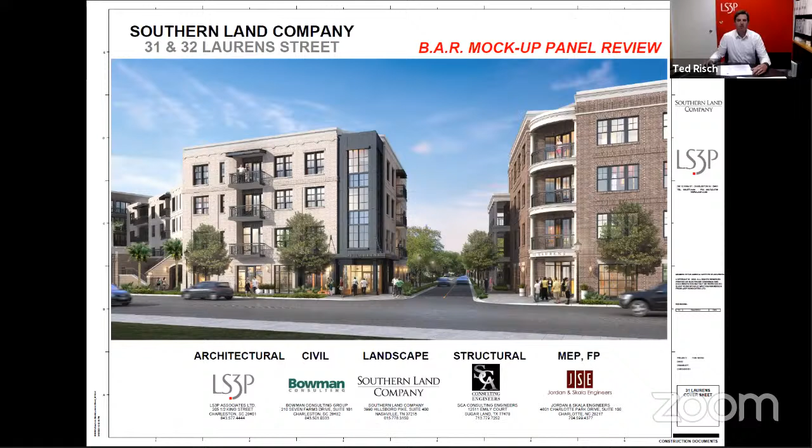I'll move right into the building A panel. Starting on the left is building A. We have our stucco wall panel on the far left of your screen, FRP cornice at the top, and carriage door with a projected box bay.

One note in the application was we deviated from the approved design of the concrete slab edge. Our original concept was to form that into the concrete using an edge form, and we weren't satisfied with how that turned out. So we're proposing this alternative design, which we had previously in an earlier iteration of the project, in a pre-finished aluminum channel. We feel it's more successful and gives us that consistent look we're going for.

Moving toward the center, we have the cast stone surround that appears on building A around this window. We abbreviated that from the original approved design as it felt a little chunky when we looked at it on the mock-up, so we brought that profile in. One item we noted yesterday on site was the vertical portion of this surround is going to have a window shoulder to sit on to resolve a sloped mortar condition on the corner there.

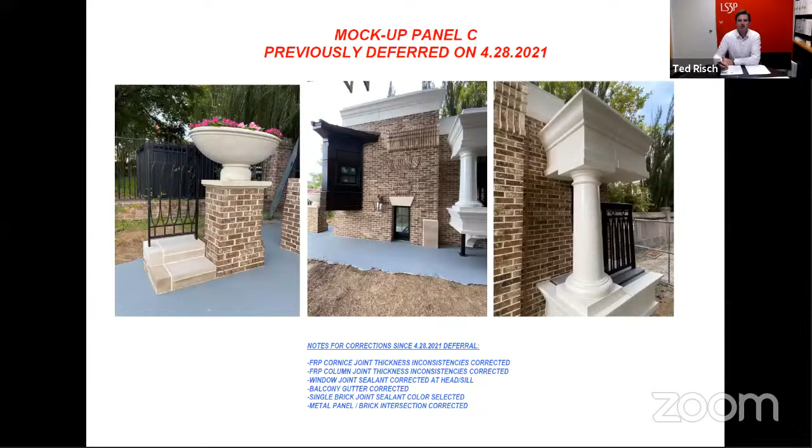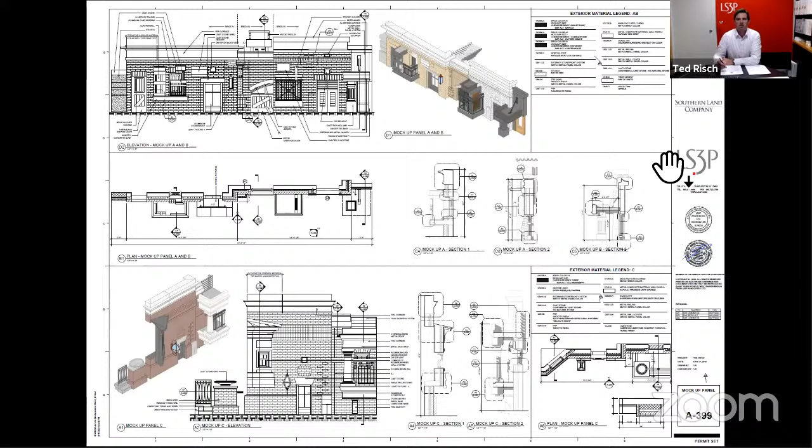The one item I was hoping to get some resolution on was the window sill nosing. When we met on site yesterday and reviewed that, I thought everybody was on board with the design direction there. That piece is a factory-installed piece of the window that goes into the accessory groove, similar to the brick mold around the window. I just wanted to make clear it's a pretty traditional design as part of the window assembly, not a separate piece, so it's actually not on the storefront—it's on the window.

All those windows start at level 2. There might be 1 or 2 on the ground floor of building C, but you won't actually be able to see that from the street or from the right of way. It is in fact part of the pre-finished aluminum window assembly.

It's due to the fact that our windows are recessed so far into the wall that we needed that projected sill nose to span the gap between the window assembly and the brick sill. If we don't have that, we'll have to introduce a new material to span that gap, which will cause a little bit of discontinuity in the waterproofing, and just another element in the window assembly we don't really feel is necessary. So I just wanted to clarify that.

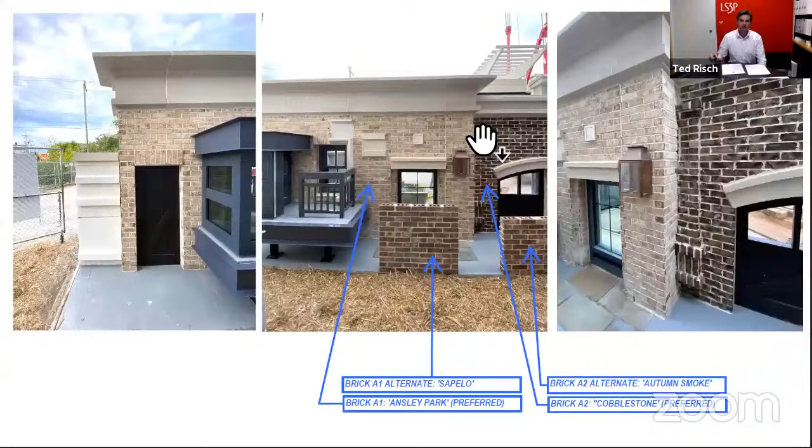And then obviously the long lead time items we are focused on at this point for the project are brick and windows. So, thank you.

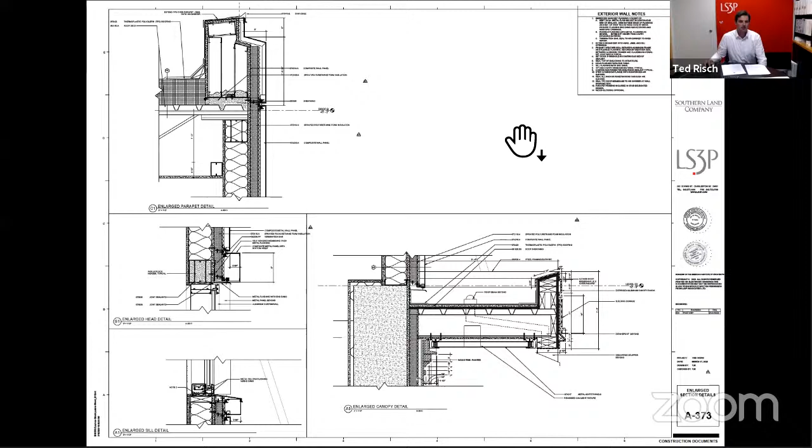Okay, we will now move to board discussion and a vote, potentially a vote. What do my fellow board members have to say about this project?

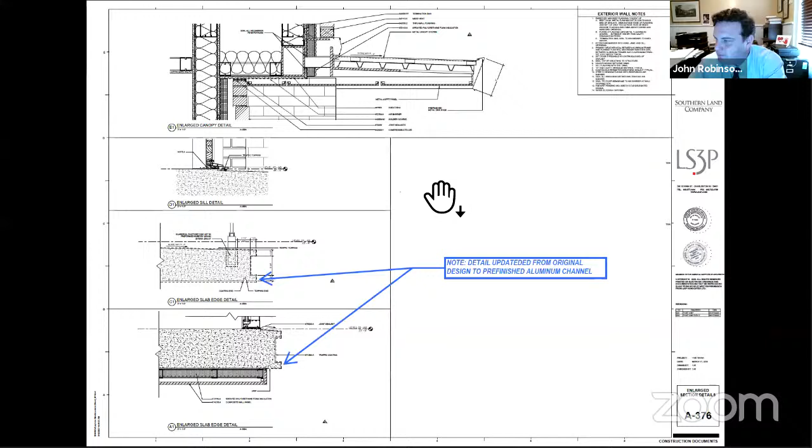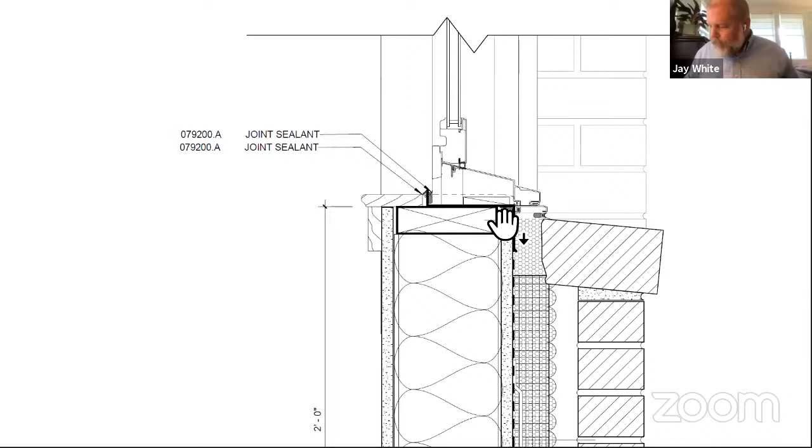I'll jump in very quickly on this. I don't really have a lot of comments. I know staff has spent a lot of time and produced an exhaustive list. I'll go by method of exclusion, the ones I have concerns about. I actually think those sill extensions on the windows are fine—that's a very typical thing. I understand they're using tabbed windows here, so they're trying to close a gap, and I saw no fault with that.

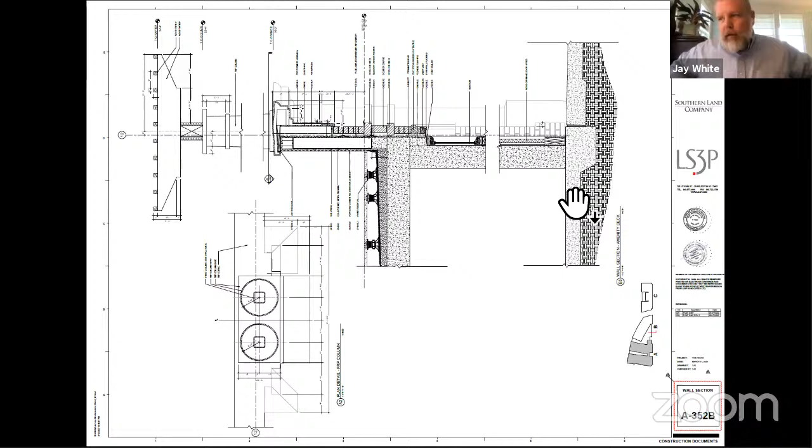Let's see what else. There was a discussion about the FRP column—I'm going to jump between buildings here, so I'm just going to be frenetic. There was some discussion about making sure the ceiling of the canopy or deck above was designed such that it reflects a beam or joist that bears upon that column. I think we all had a sense of what that meant, and it's just a revision to the ceiling design that would achieve that. It would be much improved, rather than just having that column sitting right above some bent, field-formed metal on the ceiling plane.

I would really caution the team to guard that precast or cast stone, because there were some dings that were repaired, and it was very obvious where that happened. Similarly, make sure the mortar joints between those units are really well tooled, because that was a little bit of a rough spot we noticed in the field.

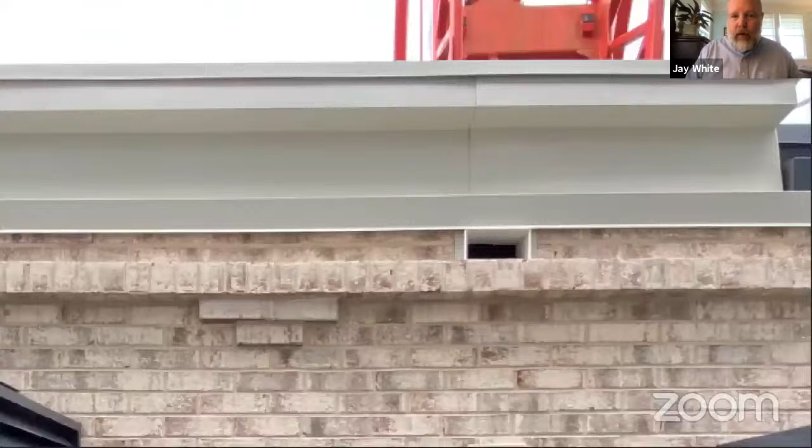A couple things I'm a little concerned about: it seems staff is recommending we abandon the kick at the base of copings and other flashings. That's now what I'd consider a traditional detail, to make sure you have a drip condition where you transfer from the metal to the facade material. That even shows up in 18th or 19th century architecture, and I'm not opposed to it so long as it's clean and crisp. I don't want to dissuade applicants from doing what is almost universally typical in architectural practice these days.

Similarly—and I lose my train of thought—with through-wall flashings, my studio's practice is to stop through-wall flashings on brick masonry at the face of the joint. That's debatable now, but if we're going to accommodate professional discretion and let people extend through-wall flashings beyond the face of masonry, we really ought not ask them to paint it, because that's a little tiny 3/8 inch strip of metal that occurs repeatedly throughout the facade.

We're asking them to paint that and keep and maintain that paint coating. I think it would be better if an architect, developer, or applicant wants to project their through-wall flashings beyond the face of masonry, just ask them to use copper or stainless or something that will weather appropriately. Lord knows we don't want aluminum or galvanized, but asking them to paint that is not really going to work in the long term. That's the sum of my comments.

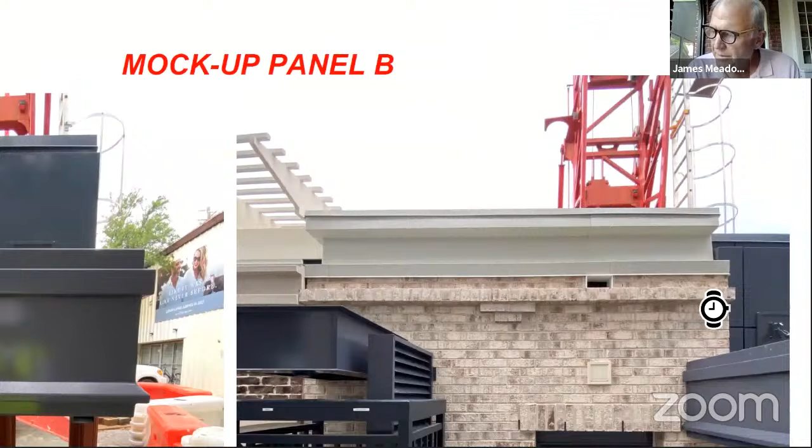As we discussed yesterday on site, the pop rivets should not be visible or exposed, even at an elevation where it's not visible from the street. They should not be exposed. Cut edges of roofing and flashing materials should not be exposed. Fasteners used for anchoring should be non-ferrous materials.

The sill on the mahogany window, I agree. I felt that it just did extend a little too far. Thanks for cutting that back.

It was unclear to me, even though I got down underneath and looked at it, how the bottom of some of the balconies were going to come together, and the small outlet that water would be draining the built-in gutters and the porches. I was unsure of where that water was going when it came out of that scupper.

I agree with Jay. The sill extensions on those windows actually come with a groove for that sill extension to be applied. And the way this wall is put together, I think that is better than adding an additional material to waterproof the window.

Also, on the strip of through wall flashing, if it is extended through the joint and then turned down, it must be a non-ferrous material. I agree that painting that probably would not be successful a long time because the edge may be cut unless it's coated after it's been bent. So some type of non-ferrous material.

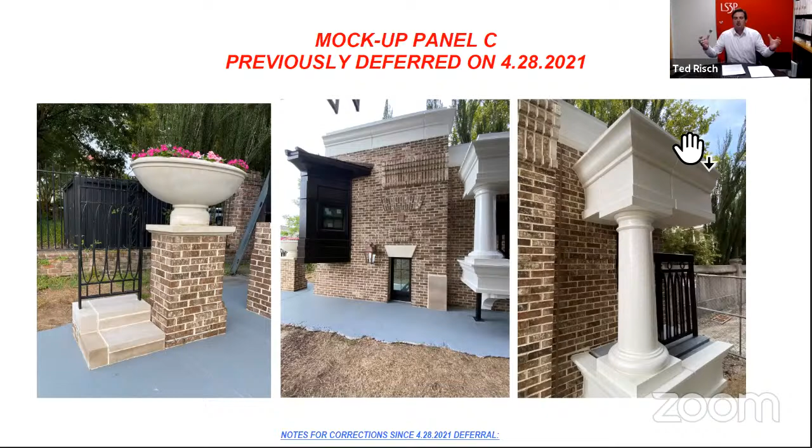Building B. Okay, so buildings A and B have a textured acrylic coating for the underside of the balcony that goes all the way to basically the drip line that returns on all three sides of the balcony. Okay.

So it's not going to be exposed concrete. It's like a direct applied finishing system. So there's no visible concrete. You won't see it. No, you won't be able to look up and see concrete. Okay, that's it. Thank you.

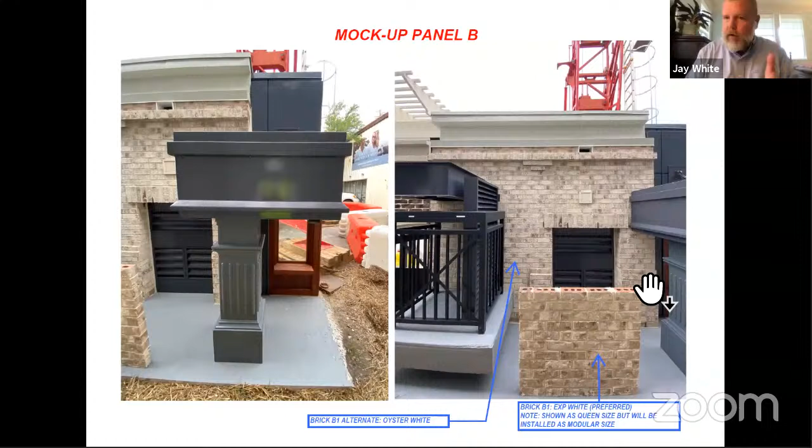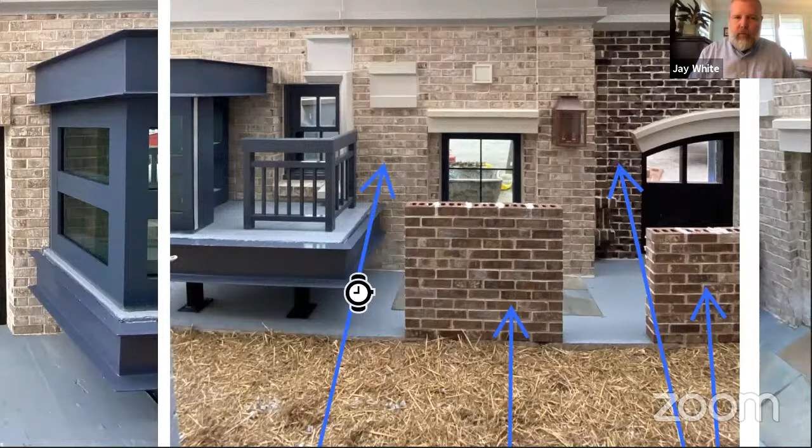Okay, further board comments or questions? One thing I forgot, and I should probably keep my mouth shut, but I think Leon was alluding to this. There's a condition where we have the aluminum plate on the face of the cast-in-place concrete balcony. We're talking about covering that gap somehow, maybe with a plate or some other thing, but also that all of that metal is so finely executed, and it really looks great.

However, on the underside, you see exposed welds that are not ground, and they're perfectly done, like stacked dimes, as they say. It's perfectly done. But considering the fine execution of the overall piece, I think those welds should be ground as well, just so that it looks monolithic. No exposed welds.

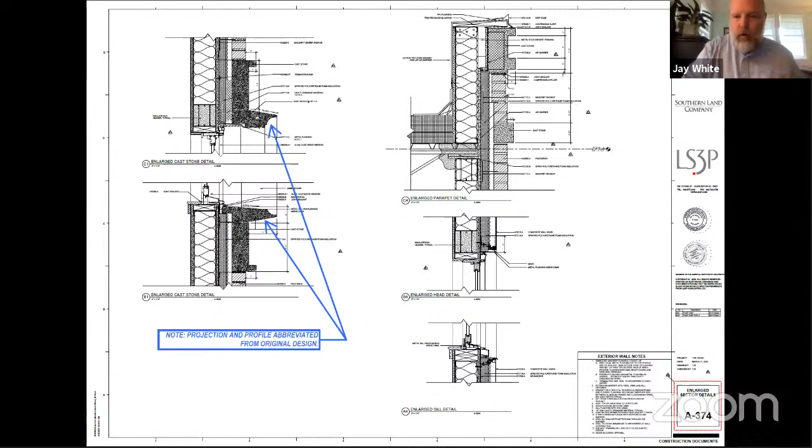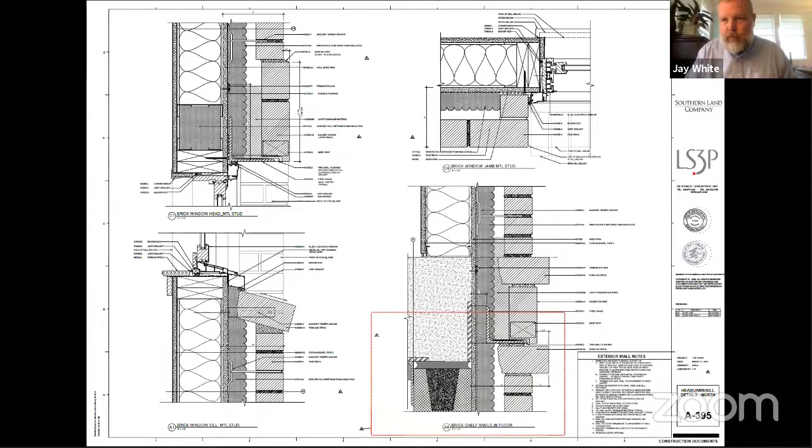So if there aren't any other board comments, I'll introduce a motion with the preamble. I think this is a very well executed mock-up at this stage. The overall execution is very finely done and one of the better versions we've seen.

I'd like to introduce a motion for approval of each of the mock-ups with board and staff comments. I second that, Mr. Chairman. The motion is for approval of the mock-up with board and staff comments.

I'll ask this as a procedural issue to either Lawrence or Tori: do we need to vote on them separately, or can we vote on them as a block since we appear to be of a mind? I think since the motion is the same for all three, you can vote as a block. I did too, I just wanted to know if anyone had a different opinion, especially staff.

Mr. White, your motion, as I understand it, is approval of each of the three mock-ups with board and staff comments. Have I read that correctly? That's correct. And I have a second from, was it Mr. Scott? Mr. Meadors. Mr. Meadors. All right, I'll proceed to call the roll.

Mr. Scott, how do you vote on the three mock-ups? Yay in favor. Mr. Meadors, how do you vote? Yay in favor. Mr. White? Yay in favor. Ms. Sobchak?

She has her hand up, which traditionally for her has been a yay in favor. If you've changed your signals, Luda, please let me know. Unfortunately, I think she's muted. But a hand in the air is a yay in favor, so that's fine, we haven't had to do that previously, you may have missed that one. And I myself vote yay in favor, so it's unanimous.

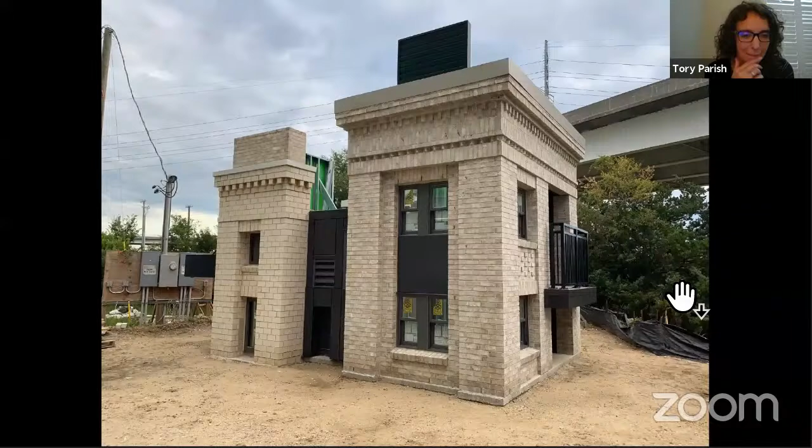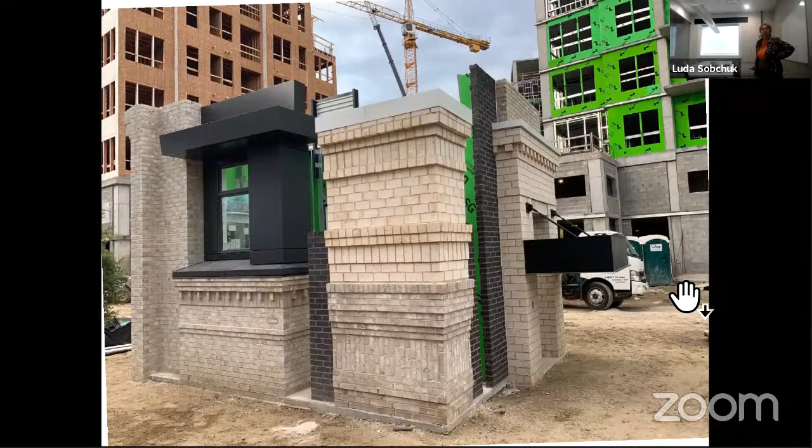Okay, we're going to show you some previous mock-up photographs. We're zooming. And then we have some photos from the supplemental mock-up. Okay, we'll try. Thank you.

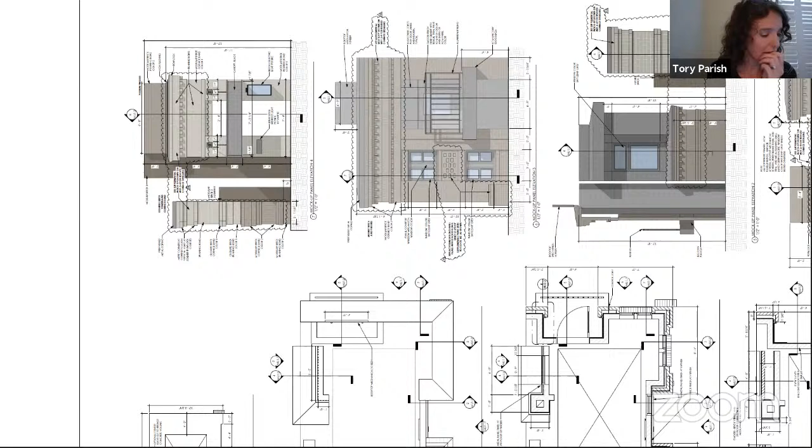Who would like to go first on behalf of the applicant?

I'll start us off, Mr. Chairman. Good afternoon everyone, thank you for your time. As Ms. Parish was just telling you, it was the end of May when we had our last discussion. The panel you see on the screen right now was the first panel we presented to you. We've continued to work closely with staff, Ms. Parish and Mr. Courtney, to go through those comments, and I appreciate her reading through them again because they've been very meaningful to us, just like it's been all the way through the BAR process. And we take them seriously. So this is where we really hatched the idea of leaving the first panel intact, so we'd have it for comparison and contrast. And we developed the idea of creating a separate panel, which could be the separate second sheet.

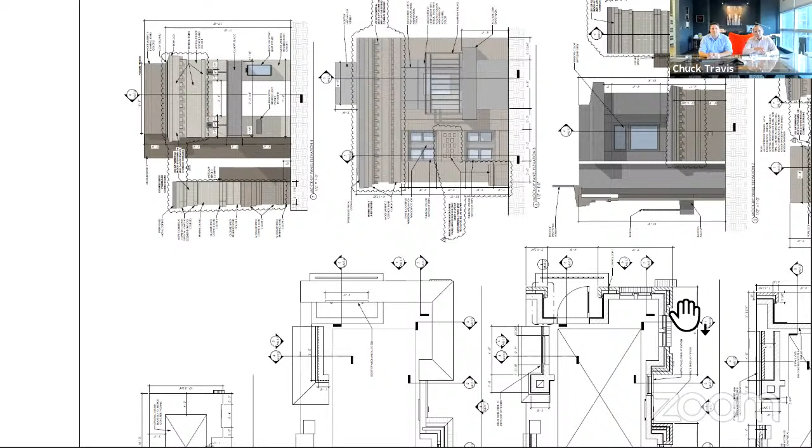If you could go to that, please. And the idea behind having this second panel—we also met, collected brick samples, and actually drove to meet with Ms. Parish and Mr. Courtney in front of their office building to show various brick options to them and discuss it. We also talked about the construction of this panel, and how one of the comments was to deal with simplifying the details so it's more complementary to the more modern aesthetic of the building we've been using all along, and we felt like the detailing is more appropriate. So we talked through all of those details. It's been a conversation that's been ongoing, and we certainly appreciate all their help and assistance, and obviously being very willing to work with us to get the panel that you guys visited yesterday and had the opportunity of meeting Ms.

Curlin on site to discuss.

We do feel like the process has been extremely helpful to us. Since you had the opportunity to meet with Maria on site yesterday, I'm going to turn it over to her. We're going to talk about the positive things that came out of that conversation, and also address some of the concerns you raised, which we put additional thought into, and give you those responses as well.

Thank you, Chuck, very much. I apologize, my camera is not on, so I'm not sure if that's good or bad. But you met me yesterday, so you know I'm real — this is not a virtual person.

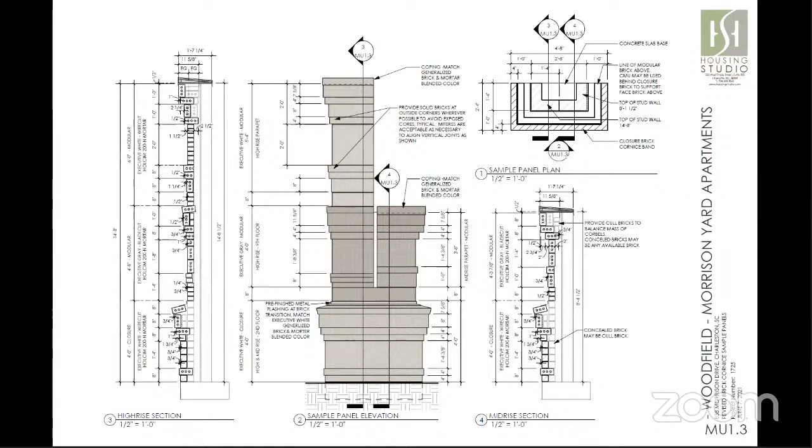And I think that will be all. I'm not sure if our project architect, Rick Kimakaris, has anything else to add, but that will be all I had to say. Thank you so much.

Thank you, Maria. Anything else from the applicant to add? No, thank you, Maria, I think you summed it up really well.

Great, that was a very responsive summary to our conversations and issues raised yesterday. Thank you. Ms. Parish, do we have any public comment on this project? No, I did not think so.

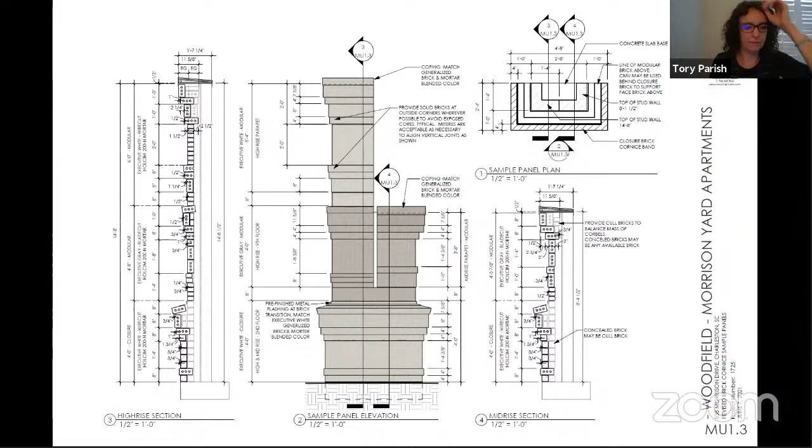Okay, that being the case, we will move to city staff comments and recommendations. Okay, city staff comments. Number one, see related notes on item 1 of this agenda for typical issues where applicable, and we can probably discuss those if needed.

Number two, this bears some explanation as follows. A, staff had originally advocated against the closure brick. Applicant was very enthusiastic about closure brick, and staff subsequently agreed for applicant to show a portion for the two lower floors on the mock-up. B, initially applicant was a bit overenthusiastic and placed the same brick high on the high-rise section of the mock-up. Staff objected to this reversal of tectonics.

C, applicant was having issues with detailing and wished to simplify them. Staff advocated for the simplification, believing in part that this was anachronistic on a new contemporary style building and simply muddled the language of the building, as well as some being too high on the building to effectively read. D, applicant has built a supplemental mock-up showing the simplified detailing, an alternative closure brick per staff's request, and colors proposed.

Number three, staff prefers the blade cut brick, although wire cut might be used at the top of the high-rise section. The staff recommendation is approval with clear differentiation of what board and staff have approved, and staff to work with applicant on any unresolved issues. If staff and applicant cannot resolve issues, a stop work order will be placed on the project and the mock-up will be brought back before the board for resolution.

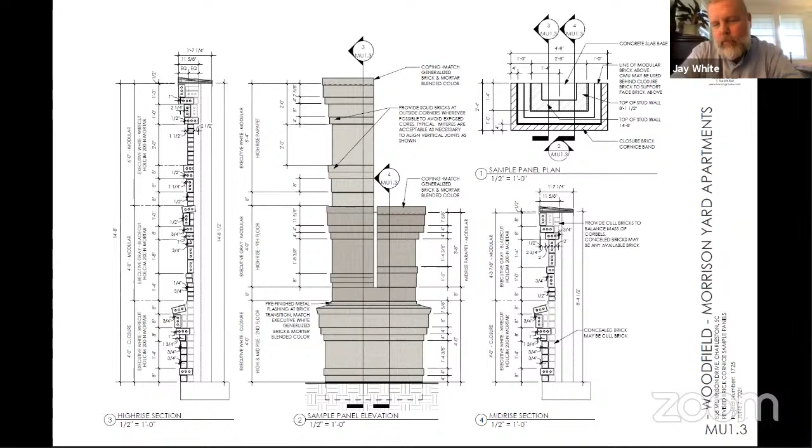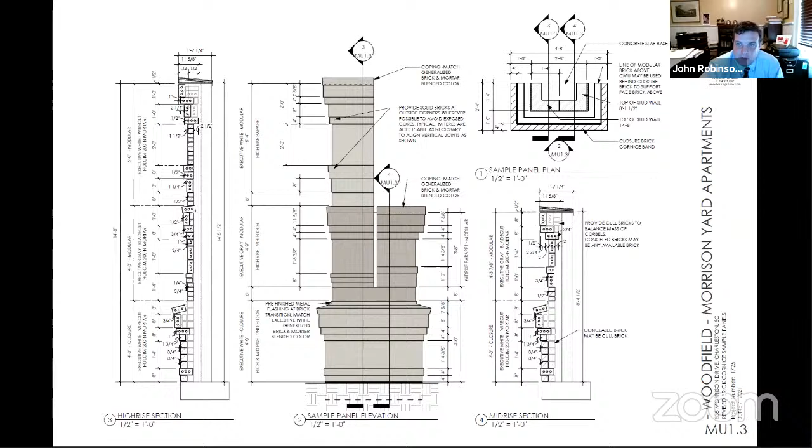Mr. Chairman, I had a quick question that the applicant may be able to answer. Is there an appreciable difference in the cost or availability of blade cut versus wire cut brick? And is there any real rationale for changing between one and the other by floor? I would say no, there's nothing appreciably different, and as far as production time, there's no difference. It's a Taylor clay brick, and essentially both finishes are essentially the same. Yeah, they're very close in practice, especially when you hike them 40 feet in the air.

I think the big issue here is the module of the brick, and I think staff granted the applicant an opportunity to press their case for what they intended with the brick module. But I think in the balance, it is better that the larger module be at the ground floor, as staff is recommending, and then we move to a modular brick above that. So the closure brick, up to the second floor level, and then modular above that. The rest of staff comments I'm comfortable with.

Okay, I know this incorporated both the question and the comment, which I think is fine. Other board comments, questions, or discussion?

I'll just jump in and add that I like the massing on the new mock-up, and I think it helped to build up some scale and see how vertical the structure is. And I think when you do that, you see that the changing and the ordering of the massing is actually helpful and attractive. I think it was a thoughtful reduction, and I agree that the simplification of the elements benefited the overall aesthetic of the project. I'm glad that the applicants were so receptive to the concerns raised by both staff and at our visit to the site yesterday. Much improved.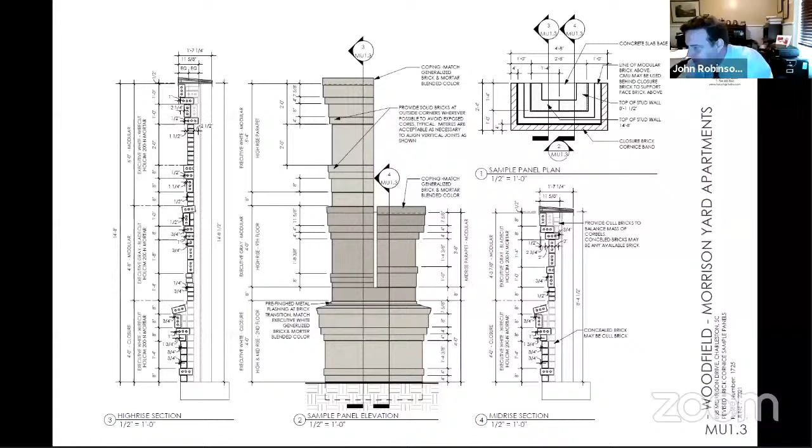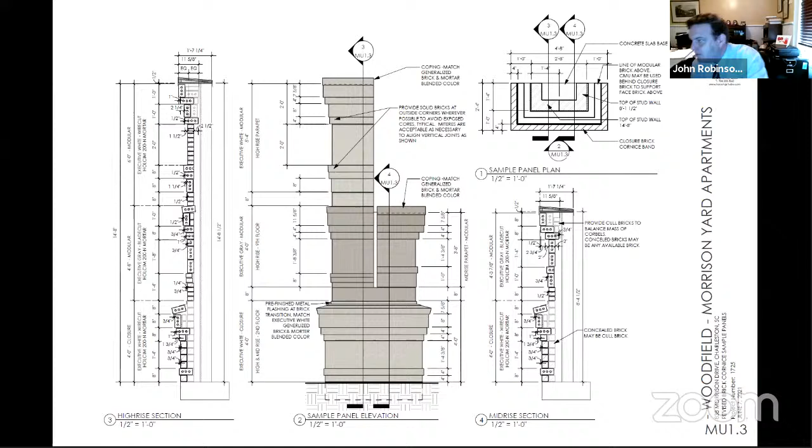Mr. Scott, how do you vote on this item? Yay in favor. Ms. Sobchuk? We may have lost her to mute again, so I'm going to scroll down to her image. Ms. Sobchuk, how do you vote? Oh, that's a yay in favor. Mr. White? Yay in favor. Mr. Metters? Yay in favor. And myself, yay in favor.

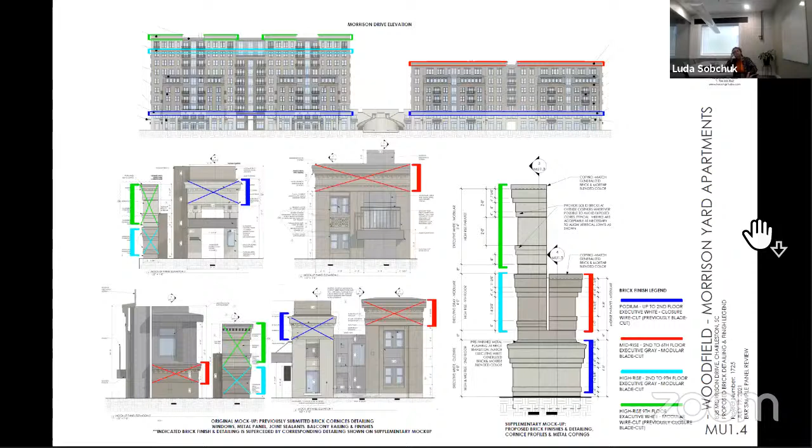So the mock-up incorporating board and staff comments passes unanimously. Thank you all. Thank you to the applicant. Thank you very much. Thank you very much.

Ms. Parrish, what do we have for agenda item 3 this evening?

Moving on to agenda item number 3, this is 578 Meeting Street. The request is for conceptual approval of a new mixed-use structure with parking, incorporating a small remnant historic structure. The project is not rated. It's in the East Side neighborhood, and the historic structure was constructed in 1929, and this is in the Historic Corridor District.

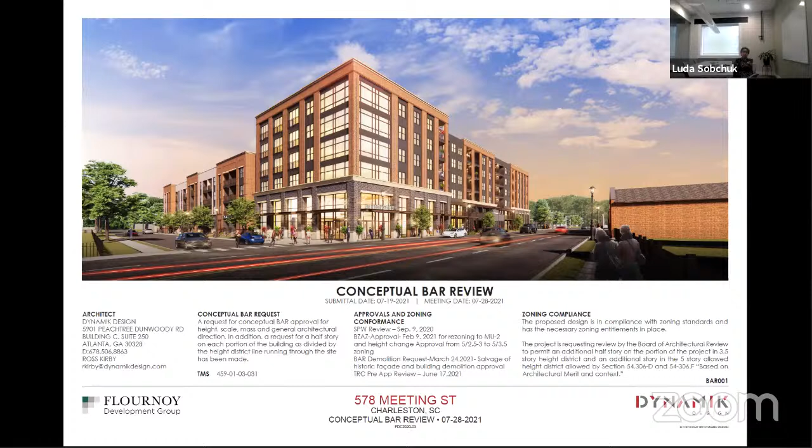Thank you very much, I appreciate everybody's time tonight for letting us get together and present this conceptual package for you. Tori, are you the one driving the presentation? No, Lawrence is driving it. Okay Lawrence, go to page 3, please. There's a few items on context I want to touch on that are relevant to the project.

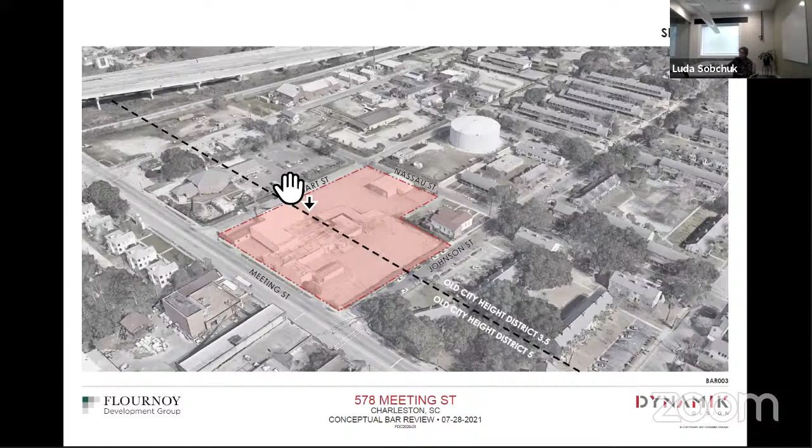As you said, you're all familiar with the site, you've driven by it recently when we had the demolition request. Some of the key context I want to point out is that a majority of the projects in the surroundings are 2.5 story residential. There's a church directly to our southeast, the chapel there, and then one just to the north across Stuart Street. Across Nassau to the east is a very impressive water tower, water tank. And just to the west of us across Meeting Street is a recently completed 5.5 or 6 story multifamily project that's set back a little bit from the street and has similar retention of a partial historic structure on Meeting Street. So if you'll go to page 8, please.

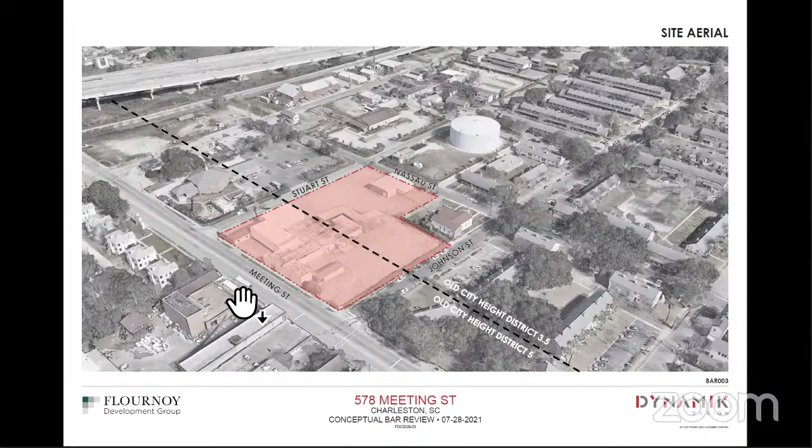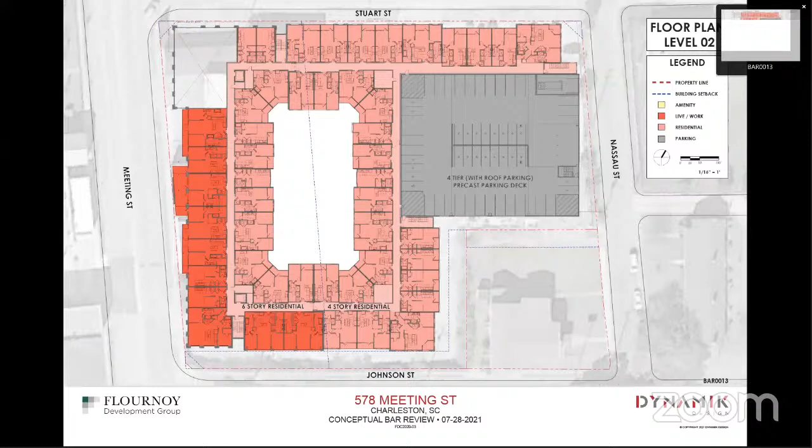What we've done is take the Meeting Street building, the portion we're maintaining, and reopen the openings, the window openings that were bricked up. Because the existing structure behind it, the roof, is failing and not really able to be rehabilitated without being replaced, we tried to come up with an idea on how we can use this space without just gutting the facade and leaving it.

So what we planned is our live work units, directly behind the Regis Mill facade and extending all the way up to where the building jumps out to the north, create an outdoor terrace for the residential portion on the second floor of those units, so there's activity that's a little more secluded and private, but still happens above the existing facade. We've created trellises and canopy shading structures up there that relate to some of the other architecture on the building.

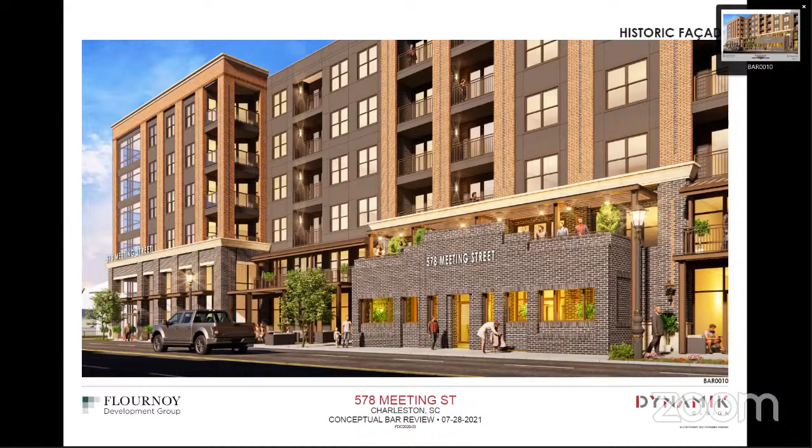And then down within the existing original building itself, what we've tried to do is convert that into open outdoor space that's semi-private, so that as you're walking down the sidewalk and people are going to the different storefronts, you get the nature of what you have in a lot of downtown Charleston, where you may see something off to your side. It may not be your destination, but it piques your interest and draws you in.

And the space inside is one that's associated with the live work units, which we were envisioning potentially as kind of a wine bar, outdoor seating restaurant type area, but that's unconditioned. So it's a way to give new life to the existing building that it doesn't currently have.

In addition, to the north and south sides of that existing facade, we've held the building back further and created additional canopies and shading structures to create a variety of semi-public spaces that are more public extensions of the public realm, so that there are seating areas, whether dining or outdoor eating or just outdoor seating, associated with the work portion of the live work units directly adjacent to them.

The balconies we've added on the second floor aren't just balconies for the live portions of the live-work units, but also serve as shade structures on the west-facing side of the project, which is one of the guiding principles in the BAR recommendations for western and southern facing facades.

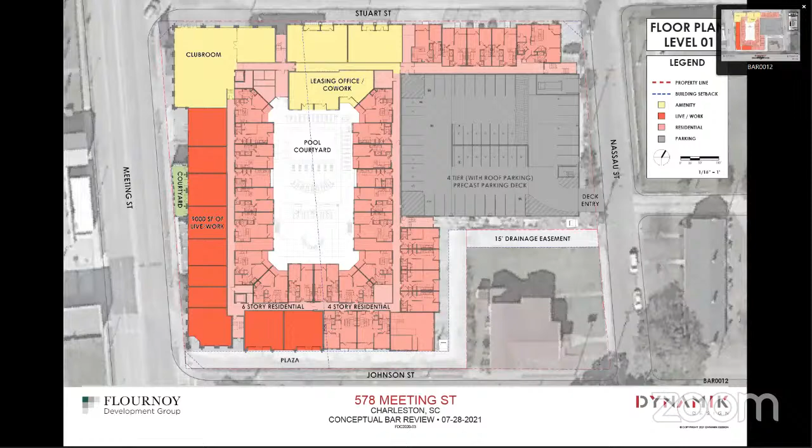And if you'll go to page 18, please. I wanted to talk a little more about page 18. Okay, thank you. There you go, perfect.

As you can see, the spaces I was talking about along Meeting Street on the west side of the project—in the very middle, the gray portion is the revitalized Regis building and the semi-private interior, unconditioned space that's the wine bar. Just to the north of that are the more semi-public spaces, which is where it's deepest, about 18 feet or so, in addition to the 10-foot sidewalk. The size of the space tapers down just south of the Regis building facade.

It's still a public space covered by shading elements that serve as balconies for the living units above. Along the south side, we have a unique situation because of an existing drainage easement where we can't build physical structures, but we can landscape and hardscape. We wanted to make the best use of that and create a lot of public outdoor space with additional landscaping and seating areas we'll continue developing as we move through the project. It presents an open, almost plaza-like space that's about 25 feet in total depth, including the 10-foot sidewalk, along those live-work units.

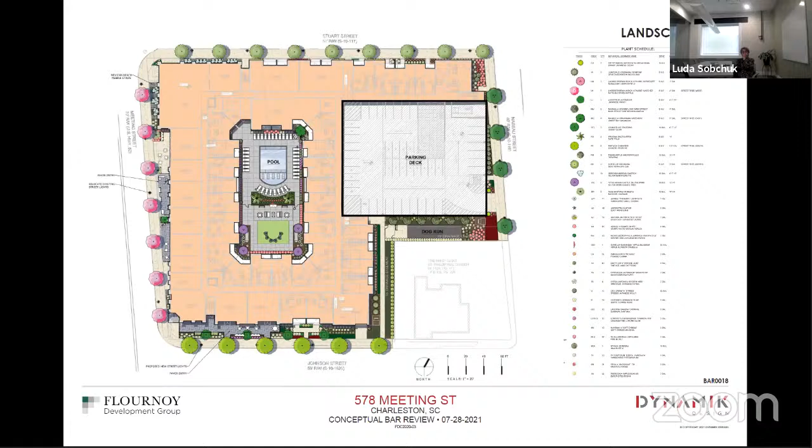What we're requesting with this project—because we're split between two height districts, the western portion in Height District 5 and the eastern portion in Height District 3.5—is an additional half story on the eastern portion to go to 4 stories, and a full story on the western half to go from 5 to 6.

Our justification for architectural merit—I want to run through a few items. I'm sure you've looked through the bulk of our presentation; we tried to take in the BAR's guiding principles and apply as many as we could to this building, working within those guidelines to justify our architectural merit. If you could, please, we're going to skip ahead a few pages to cover some specific things on page 31.

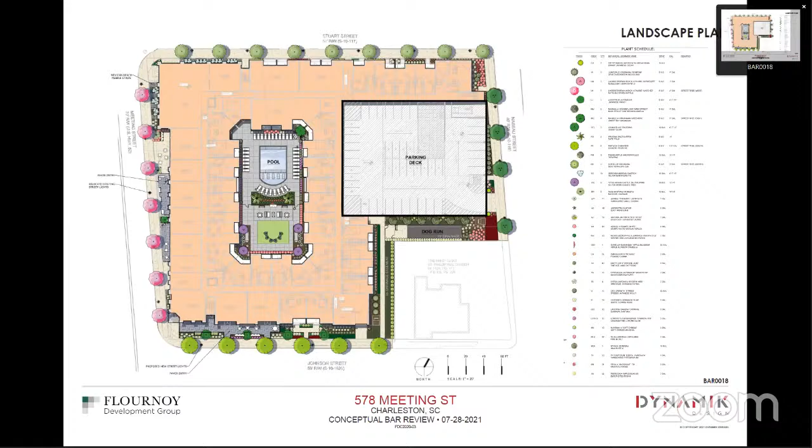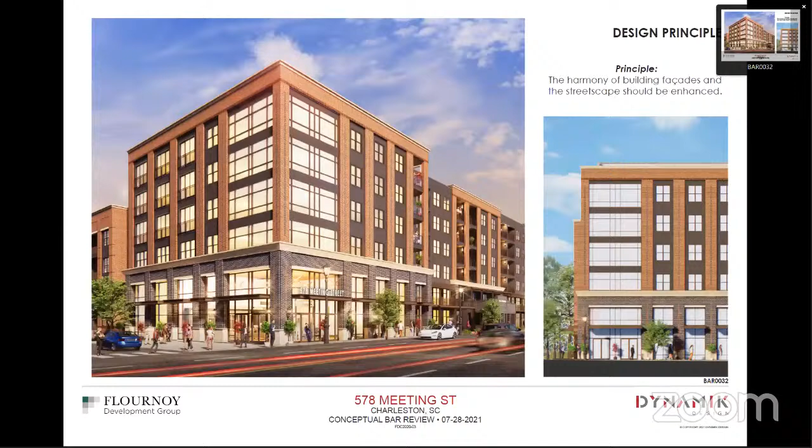We put in diagrams and exhibits for each of the guiding principles and ways we try to incorporate those into the project. In this one, I want to talk about our extensive use of brick, natural stone, and glass to create what appears to be a single-story double-height base to the building, because our intent is to mitigate the appearance of this building as 6 stories. We've incorporated full-height glazing on the first 2 stories, and a cast stone trim piece above the second floor creates a base, switching to a different material above to delineate it from the 4 stories above, creating the visual appearance of 4-story over 1 rather than 5 over 1 along this 6-story portion.

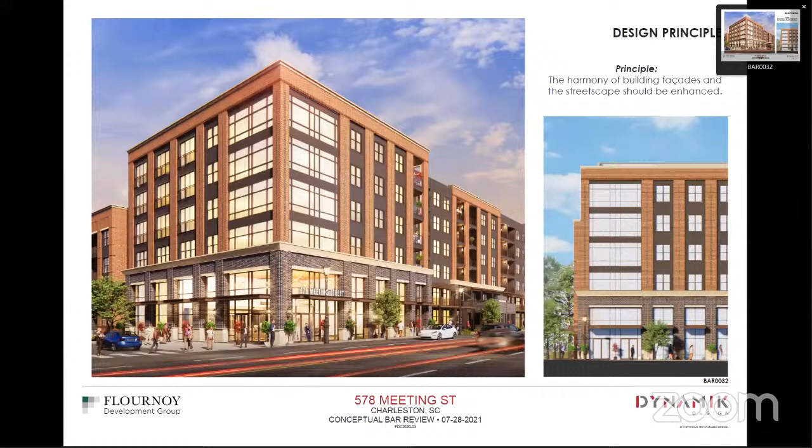What's really important to us is using authentic materials throughout, so we've stayed away from composite products and gone with natural ones — brick, stone, and stucco as well. The idea is we're working within that palette in prominent areas like the main corners and exterior facades, using them to break up the building massing, which takes up the entire city block. It's important that it be visually distinguishable from one portion to the next and not feel like one massive block.

Breaking up the materials and using authentic materials is how we've approached managing that issue. One thing to note at this corner is the implementation of more vertical elements, carrying the pilasters all the way up through the top of the building — part of the design language incorporated throughout, whether in the 6-story or 4-story portion. Even elements like the glazing at this corner on the upper 4 floors may appear horizontal in isolation, but looking at the entire composition from top to bottom, it creates a vertical element that draws your eye up and extends the verticality of the architecture.

You can see in this image, and on the next page, that we've made extensive use of glass on the ground floor for visual transparency. In this diagram you can see all the areas of the ground floor with live-work units where we've incorporated double-height, full floor-to-ceiling glazing in both the ground floor commercial portion and the residential portion above. The only place without that double-height glazing is just north and south of the Regis Mill facade, which bumps out on the Meeting Street side, so those areas don't compete with what's intended to be one of the focal points at the center of the project.

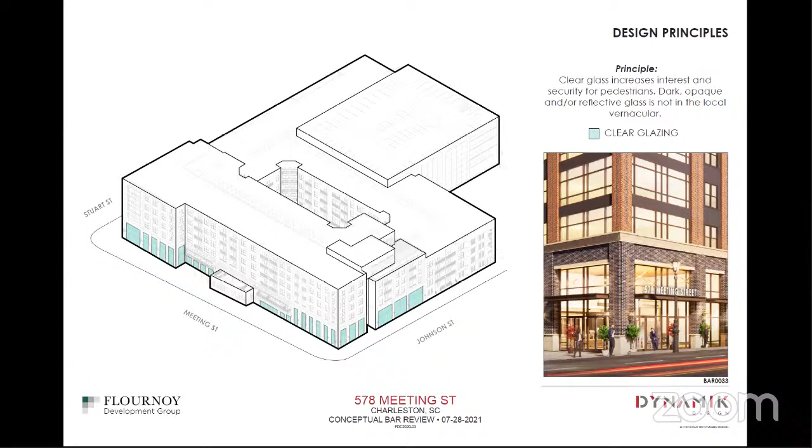On the south side, because we're restricted in what can and cannot project out over our drainage easement, what we've chosen to do is take our storefront at the ground floor and recess it back into the building. So it serves two purposes. One, it creates a degree of shading at those entrances, which is one of the design principles. And it also creates a minor but important expansion of the public sidewalk, in that recesses like that serve as a way to draw you in visually without having to provide lots of excessive signage that says enter here, or this is where the store is. It's a way to naturally draw people into the places in the building where we want them to go.

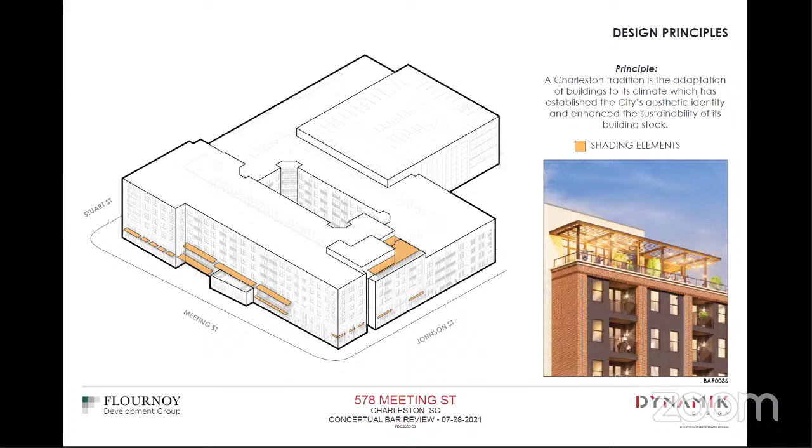If you'll go to page 29, please. Or excuse me, 47, sorry, skipped a line.

I want to talk a little bit about the overall massing of the project and the rhythm we try to incorporate. As I mentioned before, carrying these vertical brick pilasters all the way up the building for such a long block face is the way we've chosen to manage incorporating not only the verticality of the design, but also the rhythm and balance of the site.

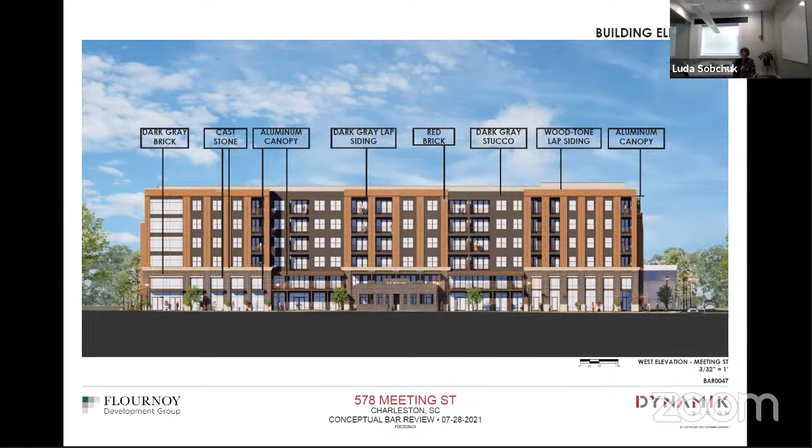You can see that we've got a portion of the west end where we've intentionally left out a pilaster so that we can draw attention to what is going to be the main part of the project that people see as they come south along Meeting Street towards Charleston. Along the eastern side, we have a similar approach so that the overall massing is balanced. And then in the center, we've kept those same type of pilasters so that we can frame the location of the Regis Milk building.

And then we let the portions in between those various masses fade a little bit on the upper levels, and have enhanced them at the ground two floors with the balconies and awnings. So if we'll go to the next page.

You can see on the south side of the site where we have the six-story portion on the left, we have our Sky Lounge where we're starting to step down, and then we're down to our four-story portion. And then we have a pretty significant separation between ourselves and the chapel to our east or southeast, to respect the context of that transition and really try to mitigate what is obviously a higher density in an area with very low density.

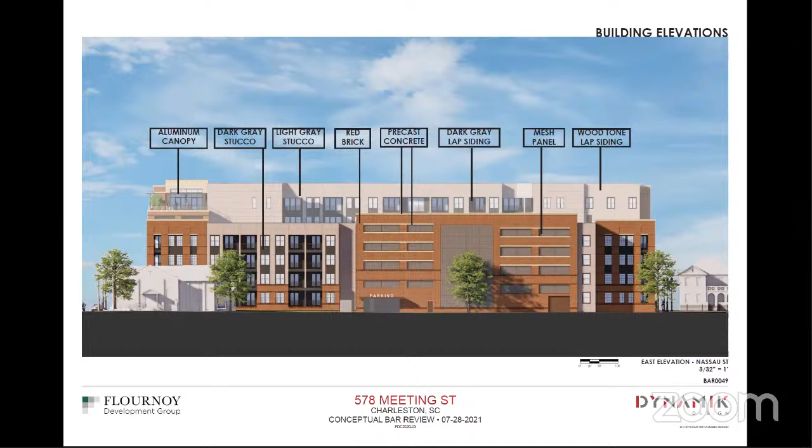We'll go to the next page please. Along the south side of the site, we have the frontage of our parking deck where you can see we've incorporated a lot of the same design language with our vertical pilasters and brick colors and materials, so that the parking deck doesn't feel like it's sticking out like a sore thumb. The design language and materials are part and parcel of the rest of the project.

Where this varies a little bit is that we've put in some fabric mesh screening into the open panels of the garage to mitigate any light spillage from inside. There are spandrel panels that come up to the height required to block any headlights, but the mesh screening is more to prevent people from actually seeing into the garage and seeing cars and lights, and also prevent light from spilling out into the neighborhood.

And if you'll go to the next page. Again, you can see on the right side, this is the north facade where we have our more public facing areas, our club room. As you move further west on the page, at the ground floor we have our co-working space, so there are stoops and stairs leading up to that. And then we have our leasing area where we've incorporated additional signage and canopy and stairs to really draw attention to that and bring people in without making it a focal center point of the entire project.

And then we use the same language on this side, same material, same language as on the other parts, but we've lightened up the color of the stucco so that it, being a lower building, appears less massive with the lighter color, and still complements the masonry colors and the other darker stucco color that we're using at the window infills. I think it's important to point out that we've made an effort to vary not only the number and size of windows, but the type. I think we probably still have some work to do there in possibly unifying the windows into a more consistent approach so that there are fewer types than what we show now, but still an adequate variety so that it doesn't feel like there's a cookie cutter approach to the window placement.

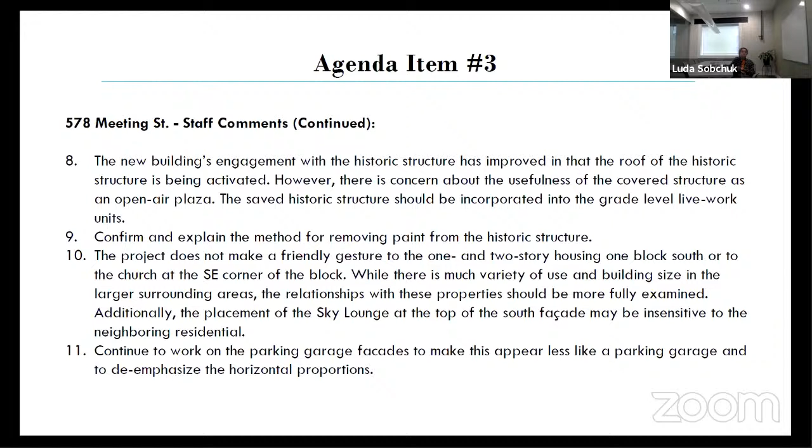Additionally, the placement of the Sky Lounge at the top of the south facade may be insensitive to the neighboring residential. Number 11: continue to work on the parking garage facades to make this appear less like a parking garage and to de-emphasize the horizontal proportions.

Number 12: the width of the spans between the brick pilasters varies around the building. While there is no desire to make the project rigid or boring, study how these spans can achieve more consistency with other spans on the same portion of the massing.

Number 13: the storefront grid at the north side of the northwest corner and at the west side of the northwest corner should match. These should be symmetrical over the building corner. Additionally, consider how this element might be extended or enhanced with an appurtenance for interest.

Number 14: per section 54-306.x, the height of the non-residential grade level floor shall be between 16 feet and 20 feet. The proposal currently shows 10 feet 9 inches. Confirm a height variance is requested for the first floor.

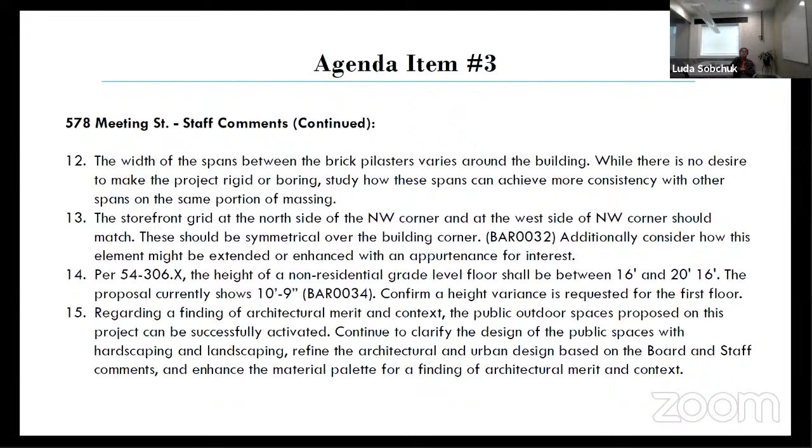Number 15: regarding a finding of architectural merit and context, the public outdoor spaces proposed on this project can be successfully activated. Continue to clarify the design of the public spaces with hardscaping and landscaping, refine the architectural and urban design based on the board and staff comments, and enhance the material palette for a finding of architectural merit and context.

And the staff recommendation is deferral for continued refinements based on staff and board comments. Thank you, Ms. Parish.

The applicant now has a 5-minute period for clarification or response to the public comment and city staff comments and recommendations, if the applicant chooses to exercise.

Yes, I do, and I'll keep it brief. I want to say that I appreciate the honest feedback from the Preservation Society and the Historic Charleston Foundation, as well as the 2 neighbors who took the time to provide their input on the project. And similarly, having worked with staff on a couple of preliminary reviews for the project, we've worked through a number of iterations on the design and incorporation of various elements. I appreciate everything they've done to help us get to this point, and I look forward to working with them to resolve some of the things they brought up.

I do want to say that yes, for the height variance request for the first floor, we do have 10'9" floor at the commercial portion of the live work units. And so we would request a variance for that, so that the second floor there lines up with the second floor for the residential units around the other portions of the project.

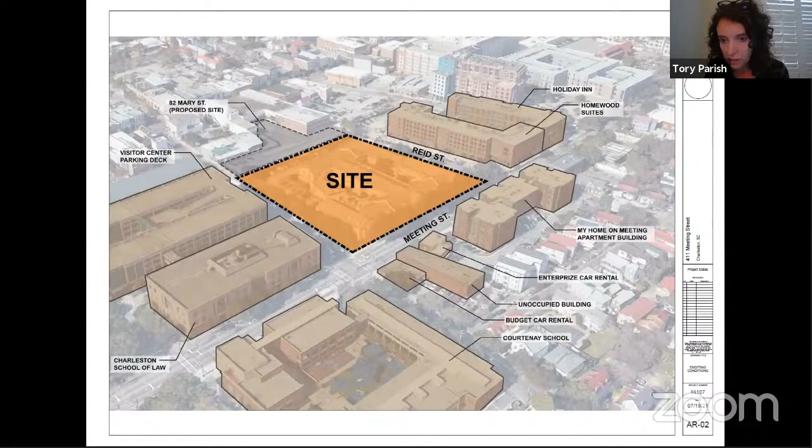There was some confusion as to whether Mr. Miller was appearing as an applicant or commenter this evening, but I have down Mr. Miller, Mr. and Mrs. French, and Mr. Ellison on this item. Mr. French was just promoted to panelist. Looking for Mr. Ellison. Okay, there we go. And Troy Miller - okay, I just found Troy. Looks like we might have everyone.

Who would like to open for the applicant first this evening?

All right, can you guys hear us? We can now. I believe Troy said he was going to speak first. You got mute, and can they hear us? Yeah, and now I'm going to start video. Give me one second, Tory. All right, there you go. You got Mike Bennett. Very good. Can everyone hear me? Yes, sir. Okay, thank y'all for being here tonight.

I'm just going to speak for 1 or 2 minutes and then turn it over to the architects. I bought this property in 1999 with the plan of ultimately tearing down these garden-style suburban apartments that were built in the 80s in Charleston. Been working with the city for a decade or more on this project, and got the entitlement to build the hotel and the residential in 2016 and 17. We then did the demolition on those apartments, and we received our conceptual approval in December of '19. During 2020, everything was paused because of COVID. We came back in April of 2021 to seek preliminary approval, and were deferred. What I heard in that meeting, very loud and clear, was that y'all were very concerned about the stucco over the frame. I believe these grand buildings, I personally prefer them to be stucco, but I heard you loud and clear, particularly James and Jay. So at a significant increase in the cost of the project, I think over $5 million, rather than doing stucco over frame, we are now going to do precast stucco, which I believe will alleviate the maintenance and cracking issues that y'all had.

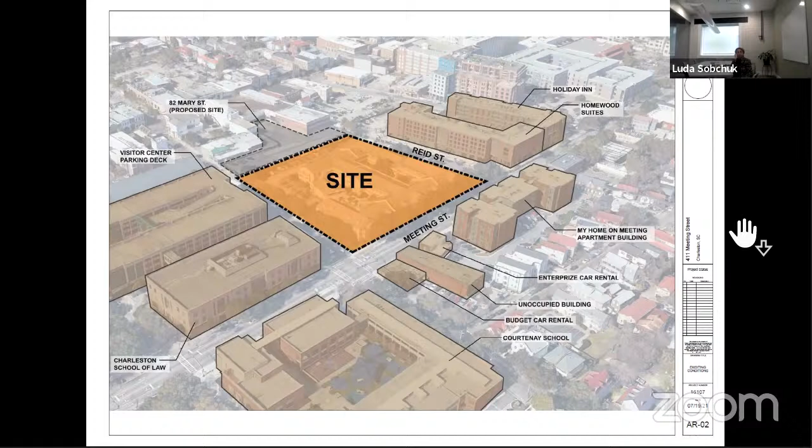If we could just go forward one slide from where we are on the screen. I put a couple slides in here just to quickly revisit the advancement of the project through the conceptual approval process. You can zoom out to fit.

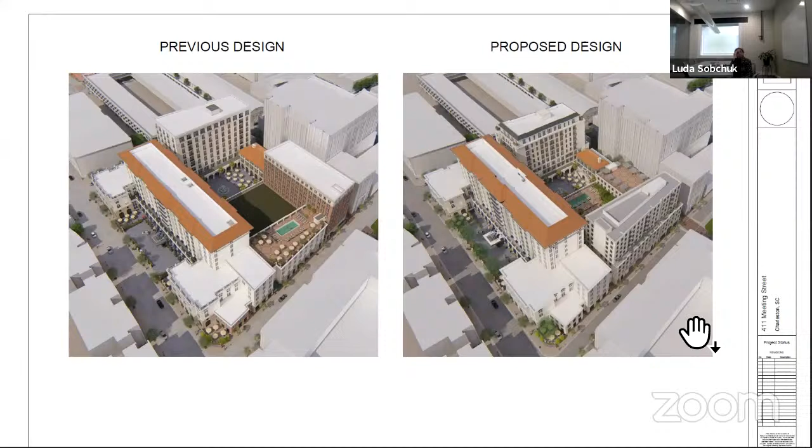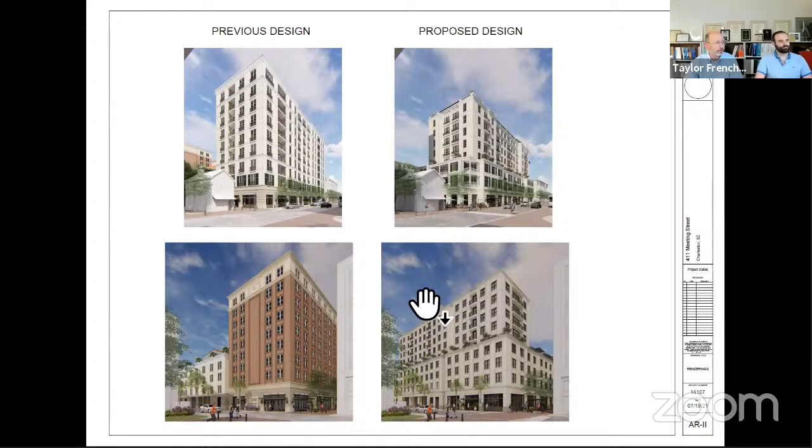If you don't mind just going one more slide forward from here. These, I think, show exactly what Mike was saying very well. On the left two images in that column are the condo and apartments as originally presented. After height and mass approval, the proposed condominium is on the upper right, and the proposed apartment on the lower right. You can see the step backs that were imposed on Mary and on the low line. A lot of progress from previous to new, and a lot of responsiveness in the design to that.

If you wouldn't mind just going one more slide forward from here. That's just revisiting where we've been. Now today we're responding to comments at the preliminary level, so now we're talking about detailing, ornamentation, and the fine scale details of the project.

As we've already stated, 3 of the comments were related to stucco, and as Mike just said, that's a big move today, is to represent this project to you in a different material. Architectural precast concrete is like stucco - it's an integrally colored permanent material that has a relatively smooth appearance. So in all of the ways that we were able to render these buildings before as a stucco building, we'll be able to do that out of architectural precast.

All the flat areas would then go from stucco to precast. Some of the low relief ornamentation that we were doing before that would have had to have been done out of stucco can now be integrated into the precast forms. The high relief detail that was going to be applied anyway in a stucco building will be applied likewise to a precast building. So we think going from stucco to precast is actually a fairly natural transition as far as the architectural detailing goes.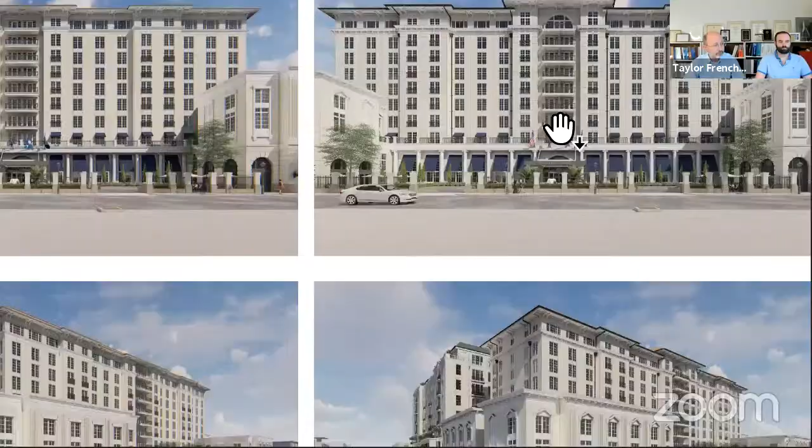One of the major moves we've done on this hotel is put a pitched roof on it. This is something that's a natural and required part of having a pitched roof - how do we handle stormwater? We think addressing that architecturally adds a richer level of detailing to the hotel that is both functional and aesthetic.

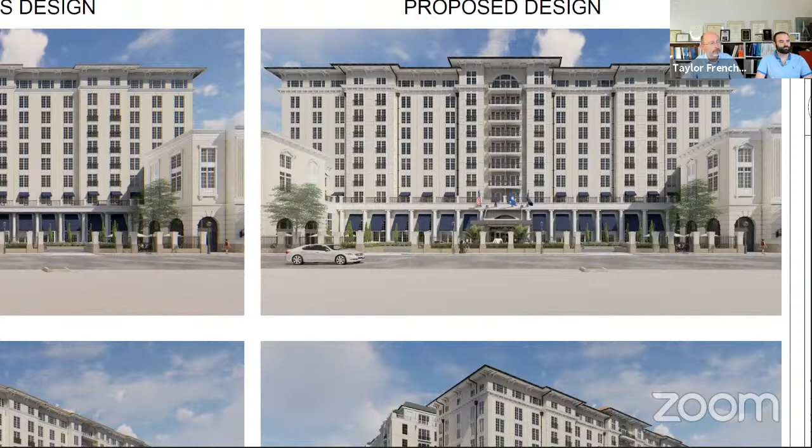If you wouldn't mind zooming out just a little bit so I can refer to the list of moves at the bottom of that slide.

Another item we've done is add rustication. This is hard to do in stucco, but very easy in precast, to give additional richness of detailing and depth of facade, adding rustication to the three vertical columns of rooms that project from the hotel tower.

We're going to see more of that in the next slide where we zoom in. The last thing we did, a small thing, was change the shape of the pediments that occur over the windows on the 3-story portions of the hotel.

If you wouldn't mind just advancing one more slide, I think some of these details really are better presented on this slide.

Revisiting those, there's the breaking up of the roof line on the hotel. You'll see in the upper right the center portion that gets popped out. And on the lower right it's shown where we're lifting up that roof a few feet to break up the roof line.

The arched window, which you noticed before, is shown clearly in the lower right image. The deeper cornices are shown well in this slide - in the lower right you'll see the deeper corbelled cornice versus what was presented before on the lower left. Also the gutters, collector heads and downspouts - the stormwater collection system.

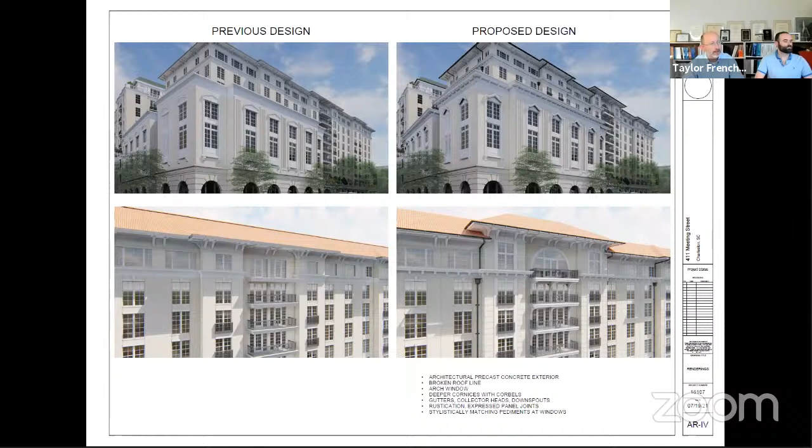We think that by doing that list, we brought the level of detailing of the hotel right to where it needed to be, matching better the energy and attention we were giving to the first three levels. If you wouldn't mind going one more slide that zooms in even farther, talking about the depth and richness of the facade.

You can see just those enhancements from before and after, going from stucco over to precast concrete.

We've added the rustication, added vertical framing elements to the grouping of windows on the popped out rooms, and we've added a quasi keystone above each guest room window. That's just cast right into the precast.

It's not a problem to do, but like the corbels on the cornice, it's an additional level of richness and detailing that I think you were looking for. That's the summary of what we've done to the hotel.

Really that summarizes our presentation. The rest of the submittal material is just a technical detailing of how all that was achieved.

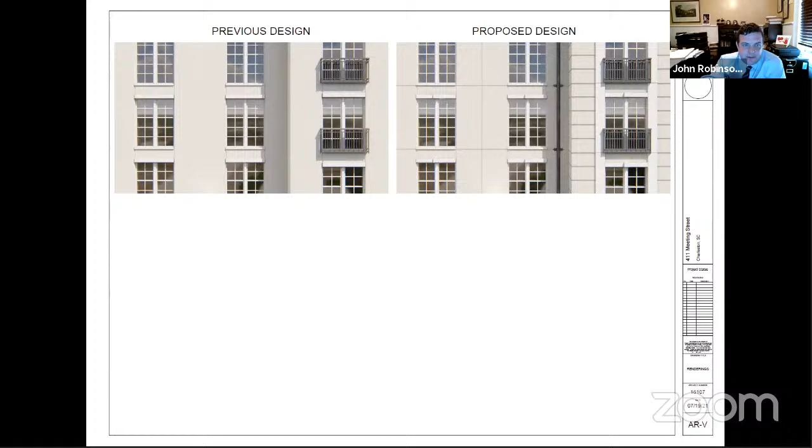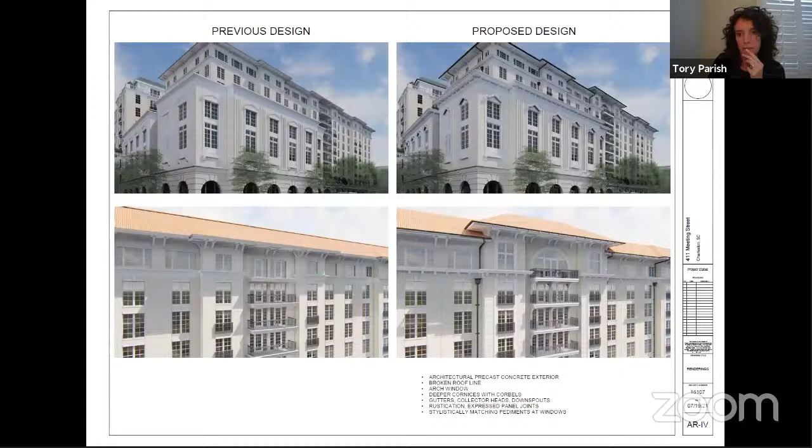Thank you all three of you for that thorough presentation. Ms. Parish, do we have any public comment on this agenda item? Yes, we do. We have Ms. Minnigan and Mr. Schwebler, and they're both promoted to panelists. I guess we can start with Ms. Minnigan, go in alphabetical order. She's available.

Erin Minnigan with Preservation Society of Charleston. The Preservation Society would like to thank the applicant for reaching out and working with us throughout the design review process. We are generally comfortable with how the proposal has progressed and find many of the adjustments made from the previous version very positive, including the increased depth of the roof form and cornice on the hotel, the incorporation of the arched window on the 8th floor, and the change from stucco to precast panel. We previously made a comment in line with staff, encouraging setting the windows deeper into the wall, and we're concerned to see the windows were still set rather shallow. However, in speaking with the applicant, we understand it will be possible to recess the windows a few more inches in the next round of drawings, and we would recommend the board incorporate that condition in their approval.

Thank you, Ms. Minnigan. Mr. Schwebler. Yes, this is Justin Schwebler with Historic Charleston Foundation.

We'd first like to thank the applicants for their dedication to incorporating the Lowline into their master plan and sacrificing the square footage along that property boundary to make a unique place for the public to enjoy. We find that this portion of the development is the most pleasing architecturally and will be one of the leading features of the Lowline path through the city. We're pleased to see the improvements to the central tower of the main hotel building. The cast stone cladding and rustication have helped to give more character to the main feature of the primary elevation, and the raised roof line at this tower is also an improvement.

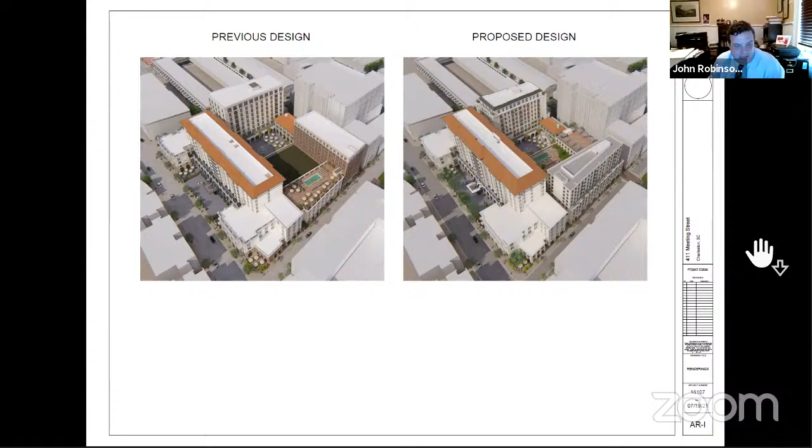Thank you, Mr. Schwebler. I'm not seeing any others on my list, but was there any additional public comment? There's no more. Thank you, that means we'll move to city staff comments and recommendations if Ms. Parish is ready after this marathon afternoon. I'm ready, let's do it.

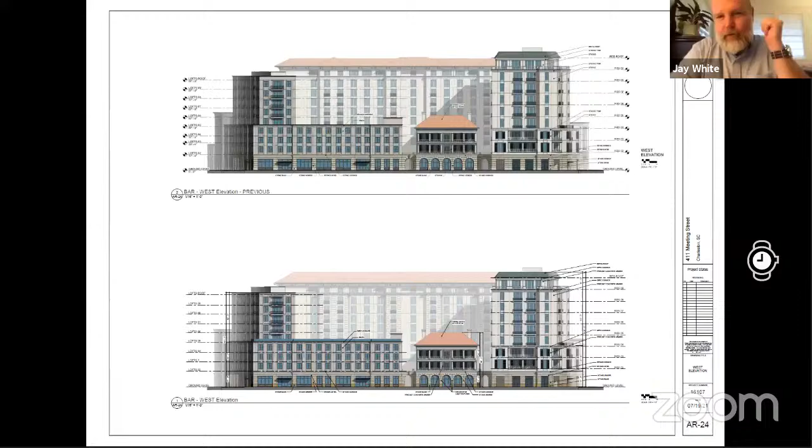These meetings used to go to 11 p.m. So our experiences are relative, Mr. White. Everyone's is to everyone else's. I understand. It's a large packet of drawings to scroll through.

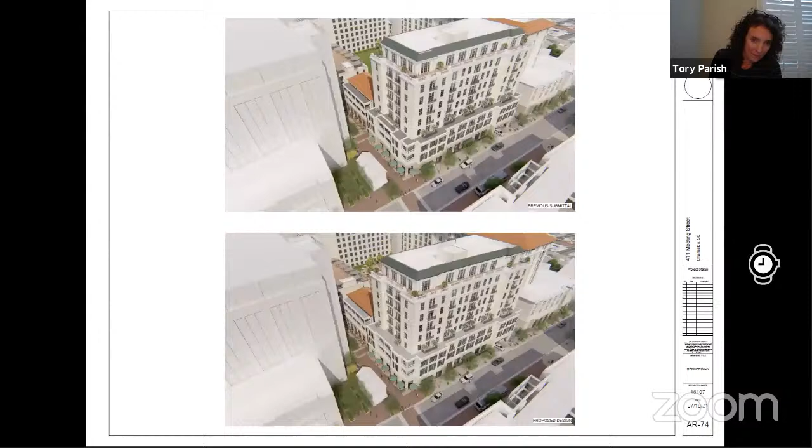Okay, we have arrived, we'll start with some staff observations. Number one, although largely maintaining and in some ways improving its elegant form, the cladding of the hotel portion of this project has been significantly altered from what was specifically requested, brick, to a prefabricated precast multi-part system shown as Gate Light on 3 of the 4 primary buildings. This product is proposed for the hotel, condo building, and boutique hotel building. The apartment building appears to use a more conventional brick rain screen cavity wall system. Any board motion will need to specifically address the use of this precast material, concrete roof tiles at the hotel, and the use of any gas lanterns.

Number two, while unfamiliar to staff and apparently fairly new to the marketplace, a quick web search indicates that this precast system is a lightweight, resilient facade system that's disrupting the industry. The featured project in this presentation is, interestingly, a 14-story hotel on which Gate collaborated to match surrounding historic masonry warehouse-style architecture in New Orleans. This particular system appears to incorporate thin brick on a 2-inch precast concrete layer, outboard of many components, including a plane of unbroken rigid insulation, a typical storefront window system, fire stopping on a structural steel framework.

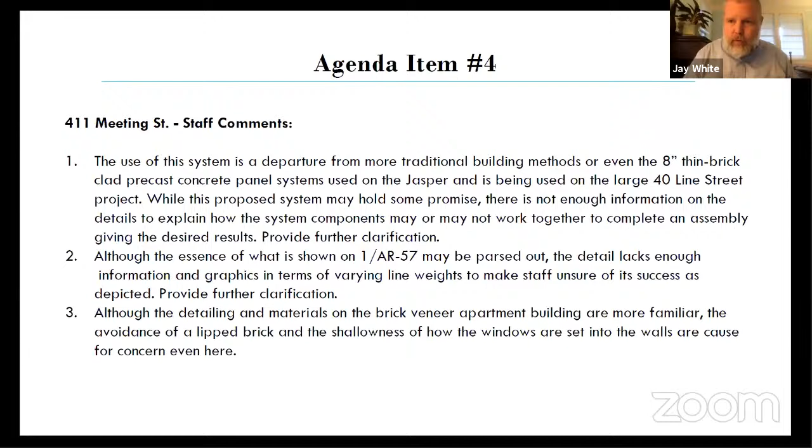Well, everybody else is still muted, so I'll jump in yet again. I'm familiar with Gate as a manufacturer of precast concrete, and generally familiar with the Gate Light product line, or project approach, I should say. More detail does need to be provided, although my professional understanding of the product is that it's a well-manufactured and well-detailed system, but that needs to be demonstrated to the board, because we only act on what we see and not on what we know from outside experiences, whatever they may be. So there is a certain level of detail, actually a significant level of detail, that's missing from this application.

But I think that the thrust of this application is an improvement on its predecessor, and I'll leave it up to the rest of the board to see if this application really needs to muster for preliminary approval. Although I do appreciate the design.

To be very specific, I don't mind the exposed gutters and downspouts. I have a lot of concerns on concealed gutters, having been bitten by them before. And I really think that we need to be consistent about the gas lantern question. That comes up a lot, and we really try to prohibit an anachronistic application of gas lanterns. But other than that, I agree with staff comments.

I'll jump in now. I want to speak purely to the improvements in the aesthetic appearance, the rustication, the breaking up of the roof line, the broken pediments, the commitment to add depth to the windows. I think that despite there being a significant change in materials, the direction is great, and the appearance is much higher quality. You can really see that.